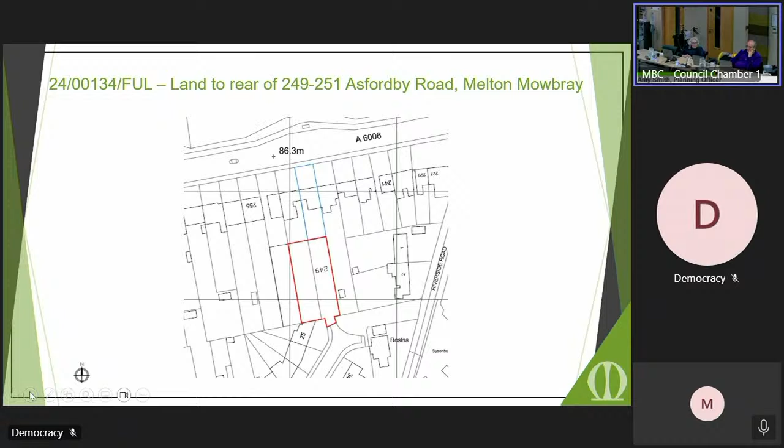Members reasoned that the application required more detail relating to the height of the development, the impact upon neighbouring amenity, clarification of off-street parking provision, and to determine if there was any impact upon wildlife. Next slide, please.

The proposed development has not been amended since its original presentation to committee. However, the applicant has provided additional details, including site sections, a biodiversity survey, and car parking dimensions. The height of the dwelling is proposed to be 7.85 metres to the ridge and 5.08 metres to the eaves, which is typical of a two-storey dwelling. The rear garden of the development would have a depth of 10 metres.

The council's design SPD does not set a minimum depth for gardens of new developments. The biodiversity survey identified the site as being unsuitable for habitats of protected species, although foraging within the site may occur. The report recommended biodiversity enhancements including bird and bat boxes, which is supported by the county ecologist and is recommended to be secured by condition. Next slide, please.

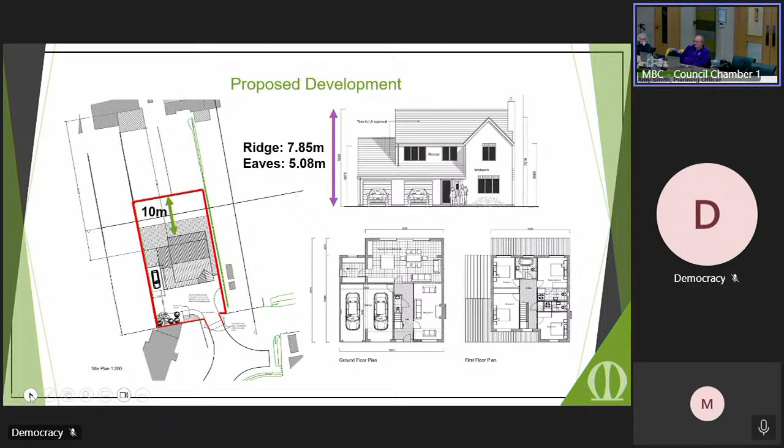The car parking provision would comprise 3 spaces: 1 external space and 2 spaces within the double garage, with dimensions highlighted on the screen. As per paragraph 1.8 of the report, the proposed dimensions exceed the requirements set by county highways. The principal elevation of the dwelling is also set back approximately 11.6 metres from the highway boundary, and the road width of Chetwynd Drive exceeds the standards set by county highways for a 2-way residential access road. Next slide, please.

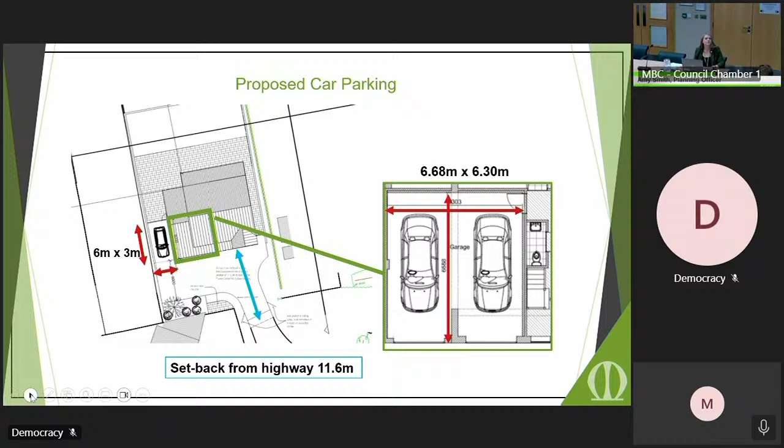The applicant also provided a photo montage of the proposal prepared by a RICS surveyor using a 3D CAD image over relevant survey data for the site. It is an accurate representation of the development. The image demonstrates that the design of the dwelling is in keeping with proportions of existing dwellings on Chetwynd Drive.

Site sections have also been submitted by the applicant to demonstrate the proposed ground levels and finished floor level of the development. It should be noted that perspectives are difficult to show on a 2D drawing, and the site sections provide a view which is not possible to see on site, given existing planting and boundary treatments which would ordinarily screen other dwellings from view.

The top site section shows a section through the site in a south to north direction, with 25 Chetwynd Drive shown on the left of the screen, the development in the centre, and 251 Asfordby Road to the right. The bottom site section shows a section through the site in an east to west direction, with 1 and 2 Riverside Road to the left, and 25 Chetwynd Drive on the very right.

As the sections show, the ground of the site would be cut to level the site where the proposed dwelling would be constructed. Ground levels would change by a maximum of 1 metre, as shown by the red sections within each site section itself. The blue dashed line depicts the ridge height of the proposed dwelling in comparison to the heights of neighbouring dwellings.

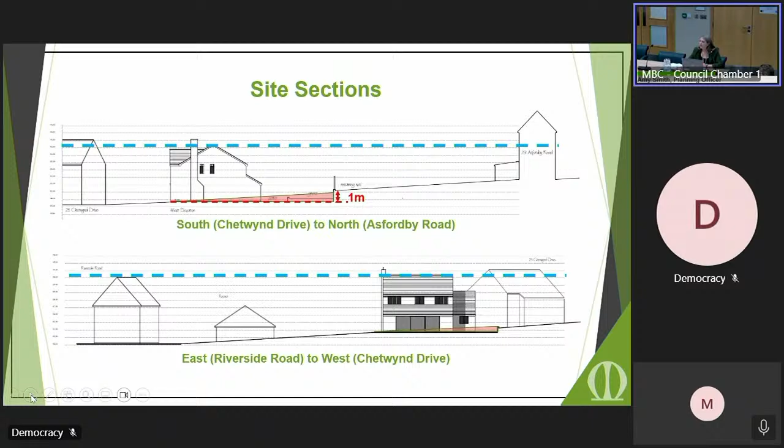The council's design SPD sets the separation distances between dwellings. The distances shown on screen exceed the minimum distances required by the SPD, and as such, there are no concerns of the development resulting in impact to amenity of neighbours.

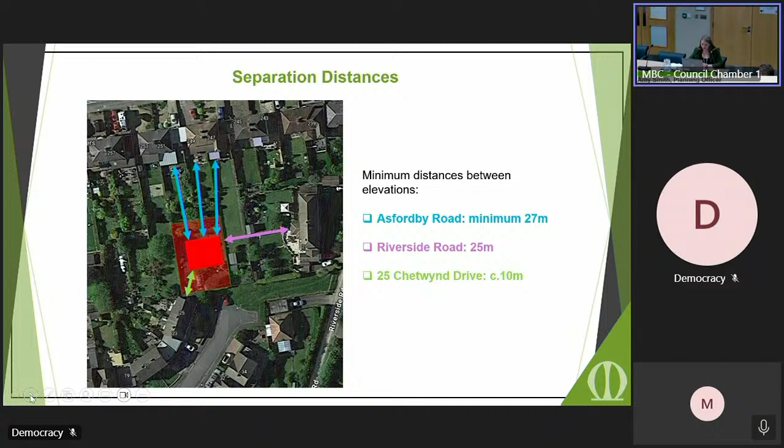In summary, and in response to the 4 matters of the deferral, site sections have been submitted which demonstrate the height of the development is proportionate to neighbouring dwellings. The proposals are acceptable in regards to impact upon neighbouring amenity. Car parking spaces and the road width of Chetwynd Drive are in excess of the Highways Design Guide requirements, and there are no constraints of biodiversity on the site. As such, it is recommended that the application is approved subject to conditions.

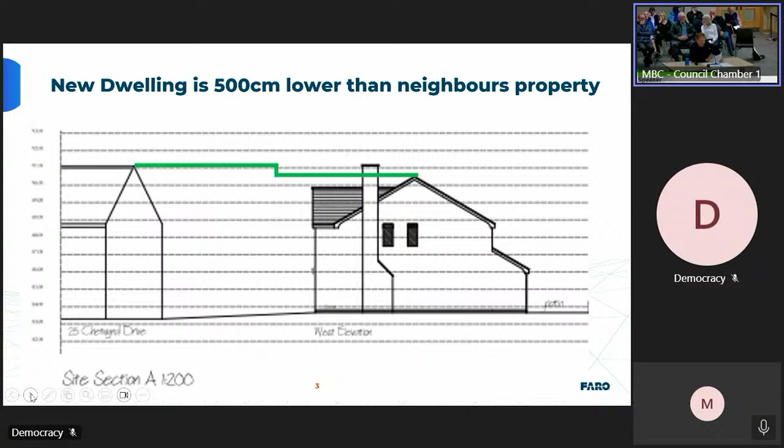Also relative to the property on Riverside Road, you can see that's actually 500 centimetres higher than the Riverside Road property. That's primarily due to the contours of the land, as the land runs away as you go from basically west to east. And it's above the back-to-back planning distance, even though it's side to side of 21 metres. So that exceeds your own SPDs.

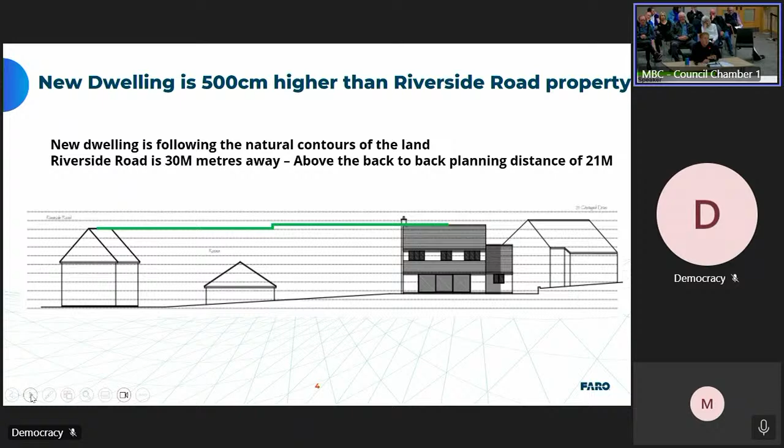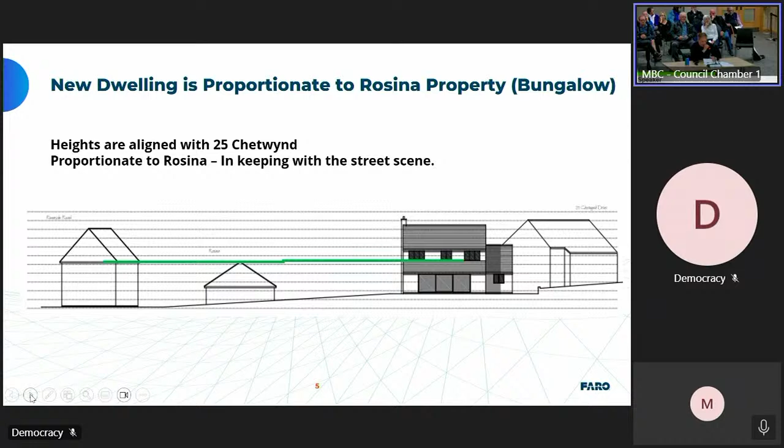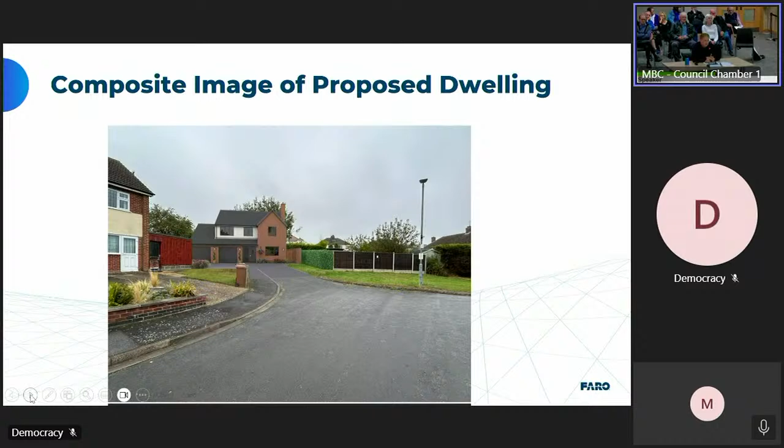I've also done one relative, on the next slide please, to Rosina Cottage, where you can see that's proportionate to the bungalow on Chetwynd Drive. If you jump to the next one, that's a composite image, as Amy highlighted, from a RICS survey. There was an image floating around I seen on an email last night that wasn't from survey data. That's representative from survey data with GPS positioning on all the survey points, done from a RICS surveyor, and is available for the committee if you want it. Next slide, please. We also wanted to emphasise that we've designed it in keeping with the street scene.

30 seconds remaining. Okay, so next one please. Ecology has been addressed. Next one please. Highways has been addressed already.

Coming to the final slide, we just really wanted to summarise that we want this to be judged on its planning merit. We've listened to ecology, we've listened to highways, and we want it to be reviewed on its planning merit. We've tried to address every concern that's been raised by this committee. Thank you very much for your time. Happy to take any questions.